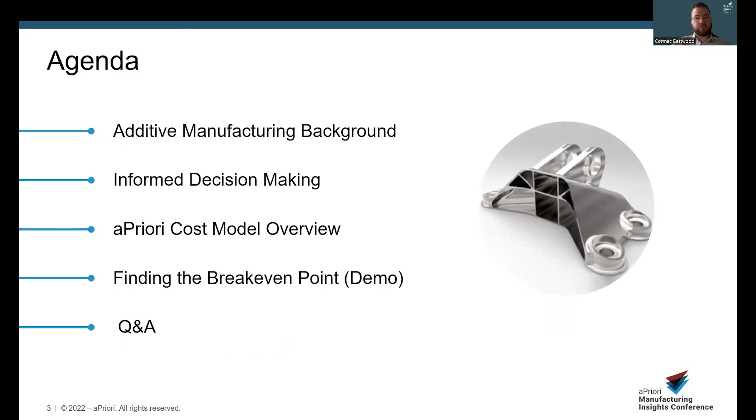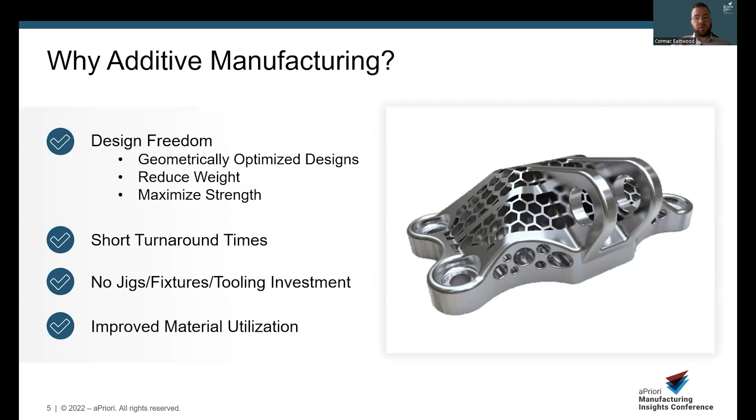So why would you choose additive manufacturing? Additive manufacturing gives you design freedom, allowing you to optimize designs while reducing weight and maximizing strength. We can decrease turnaround times and reduce investment, as there will be no jigs, fixtures, or tooling required. And quite importantly, we can improve our material utilization by only using what we need.

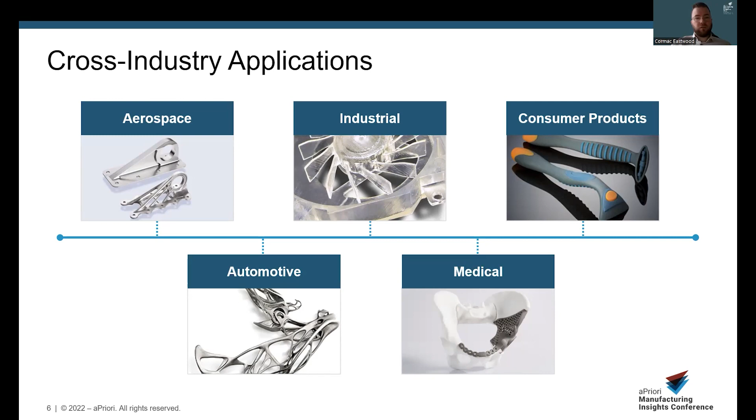Additive manufacturing can be utilized across many industries. It truly gives us design freedom to fix a wide range of problems, ranging from medical inserts through consumer products to industrial, aerospace, and automotive. In aPriori, we support 4 different processes within additive manufacturing.

These processes are material jetting, which is what most people recognize as 3D printing. This lets us deposit droplets in a layer-by-layer format and cures by UV light. Typical uses here are for non-functional prototypes, and the materials we utilize are rubber, ABS, polypropylene, or wax casting.

The second process we look at is direct metal laser sintering. Here we use a metallic powder to create a part, also printed on a layer-by-layer format. The typical uses here would be checking the fit, form, and function of a new design without paying for an expensive part. And our typical materials here are metallic, as mentioned by the powder. So we would have aluminium, cobalt chrome, copper, Dentaurum, and various ranges of steels and titanium alloys.

Our third process would be selective laser sintering. So here we use a reservoir of powder, which then gets solidified using the laser, again being built on a layer-by-layer format. Again, we look at uses here of fit, form, and function prototypes. However, here we use materials such as plastics of nylon, polystyrene, polyetheramide, PS, and PA.

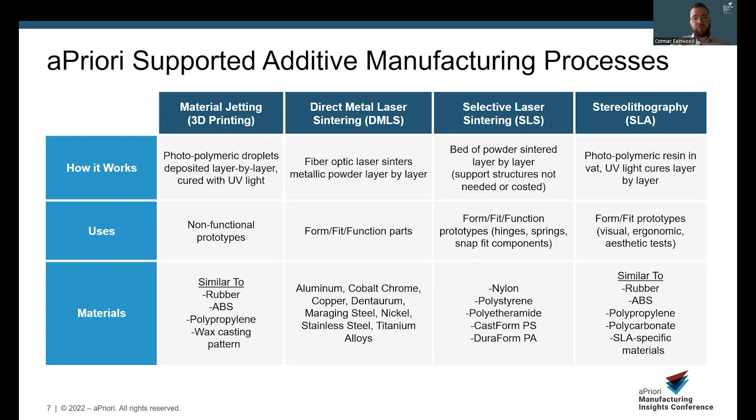So let's have a check on informed decision making. What trade-offs do we need to consider for additive manufacturing? If we use traditional methods, we get cheap parts which may be slightly heavier at high volumes. However, at low volumes, our part cost rises in traditional methods such as machining or casting. Part cost in additive can be high, however, it will likely be lower than subtractive manufacturing methods for the lower batch numbers we talk about in prototypes.

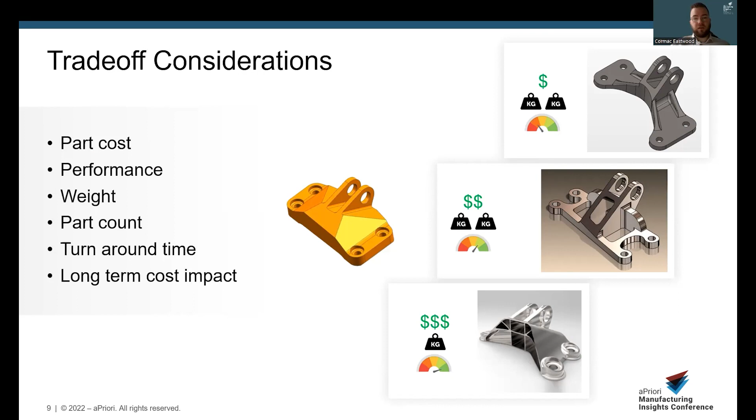If the performance is acceptable and the weight is optimized, typically these parts can be turned around in a short lead time. So that turnaround time is a key consideration. As we grow our production volumes, this becomes a key factor in the break-even point between methods. The higher the volumes, the lower the cost for traditional methods due to machine utilization. Additive manufacturing is not as cost-effective in this regard as your production volumes go into the thousands. Additive machines are cheaper and costs level off a lot sooner, so there's less of a cost delta as the volumes grow.

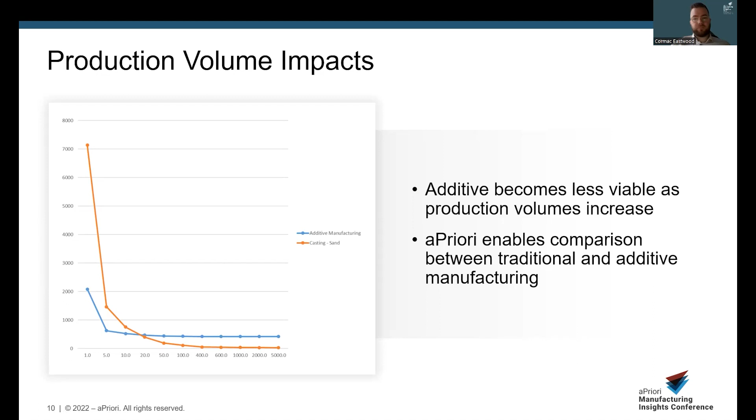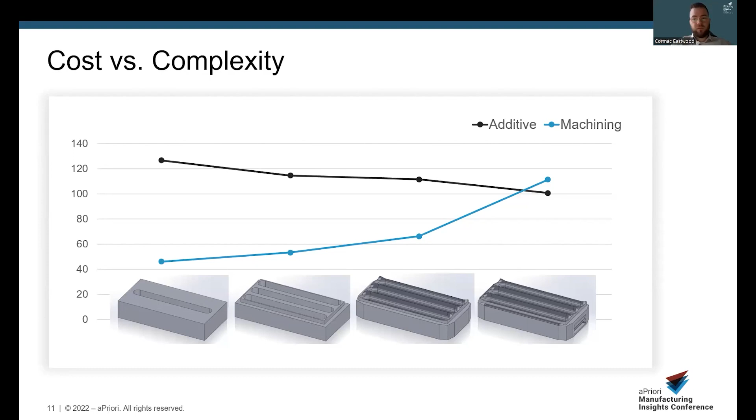Although additive doesn't have a huge cost delta as the volumes grow, it also doesn't have a huge cost delta between simple and complex parts. So the flexibility to print detail, if required, is there for the users. Balance this against a machined detail part. A detailed machining part may require a lot of passes, some tool changes, possibly machine changes, which will obviously drive cost up. Subtractive methods will have a greater cost delta between simple and complex.

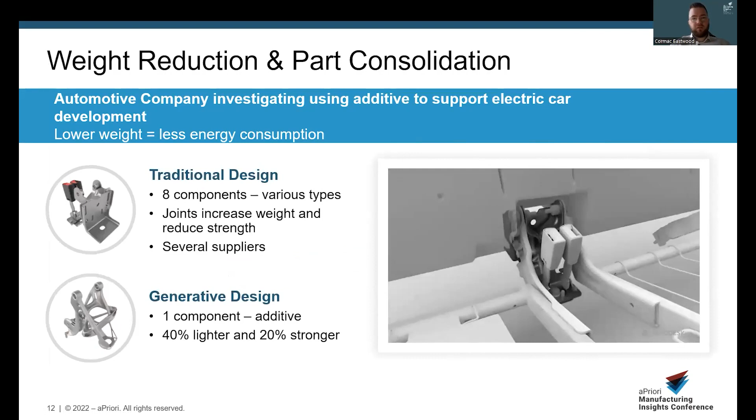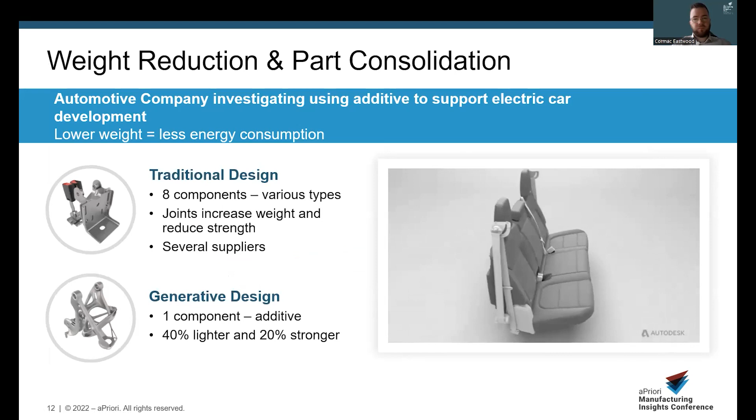Let's take this automotive example of additive weight reduction and part consolidation. An automotive company was investigating using additive to support electric car development. So obviously the lower weight in an electric car, the less energy consumed through the battery. Traditional design in this example had 8 components of various different types, plastics, metals, etc. Joints increase weight and reduce strength in this 8-component assembly, and also there's several suppliers to manage.

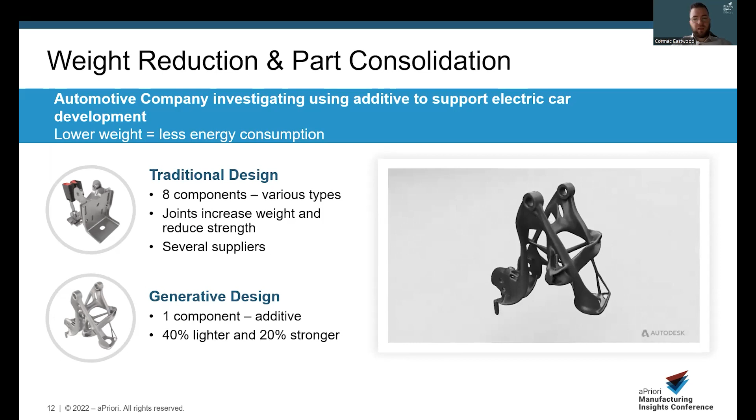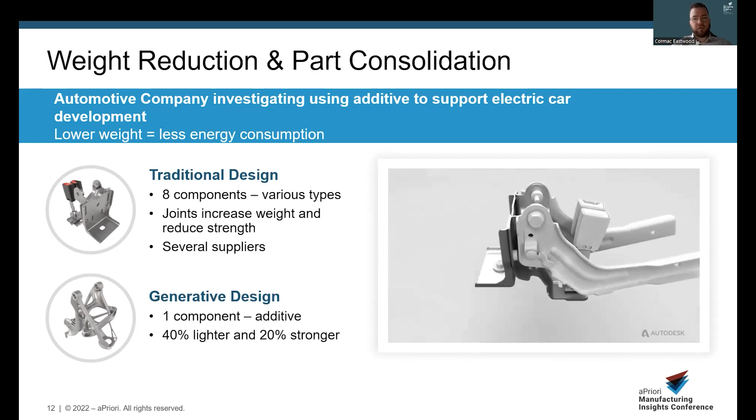Using generative design and considering additive manufacturing processes, the designer can reduce the number of parts to one component, making the component lighter and stronger, and also can utilize on his cost journey aPriori to cost during the different iterations of generative design. This allows the designer to pick the preferred method of additive manufacturing process.

So what about the aPriori cost model? In aPriori, we look at real-time cost simulation applied to additive manufacturing. Currently, we support 4 processes, as previously discussed: direct metal laser sintering, selective laser sintering, material jetting, and stereolithography. Our use cases in additive manufacturing would be early design decision-making, design to cost part optimization, and supplier negotiation.

The key features here are physics-based cycle time calculations, build direction, so we can simulate different options across different build directions, support structure identification and removal, evaluating our tolerances, evaluating our secondary machining options, material cost trade-offs, nesting optimization, and evaluating our layer thickness overrides.

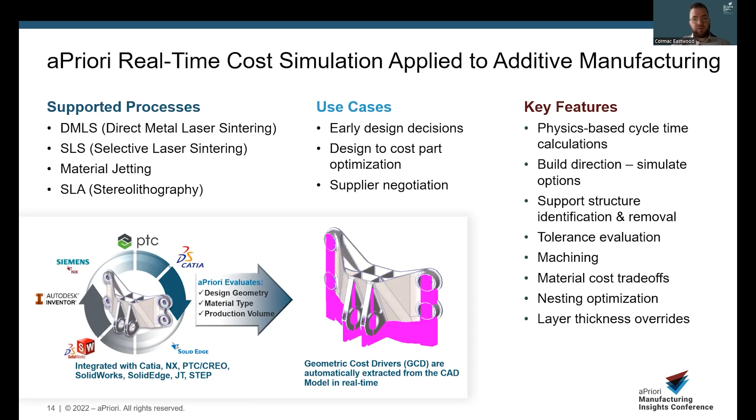So let's have a look at aPriori Professional and demo how we can do some break-even analysis. In this demo, we're going to cost some parts in additive processes, and then we're going to compare them with a casting part of a similar geometry and understand what is our break-even point. The first thing we're going to do is open an additive part in aPriori Professional.

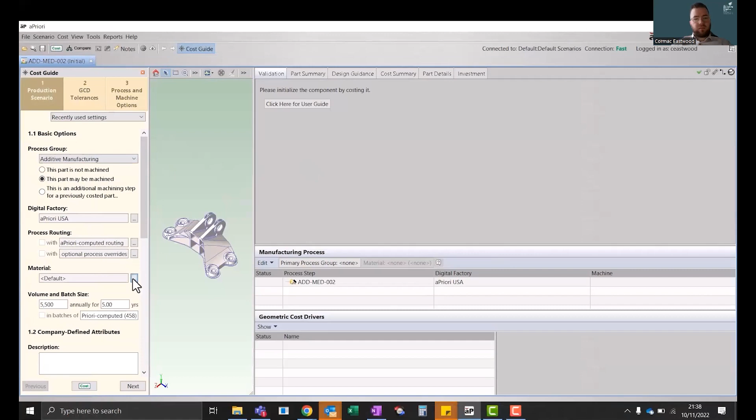Now we're going to select additive manufacturing in the cost guide, and we're going to select a material for our initial cost. What you will see in the material selection is that we have a process column. So each material is assigned to a process, and the user can, from this point, effectively pick the process they're using. We're going to start off with 3D printing.

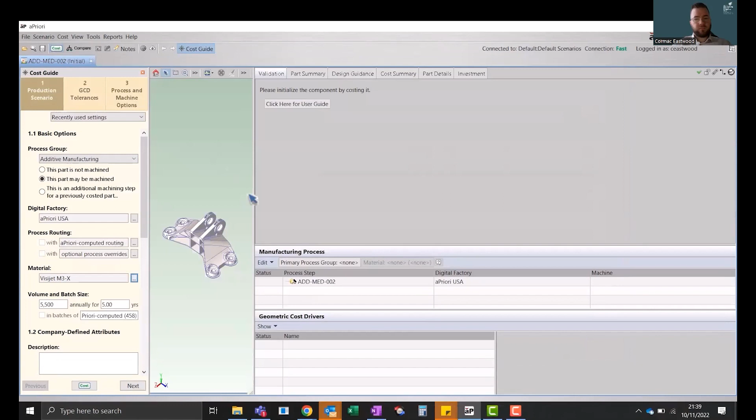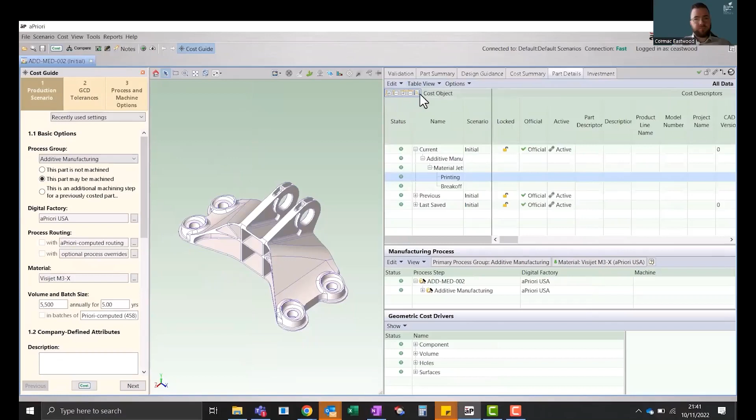I'm going to select an ABS type material to force aPriori to cost in the 3D printing process. So now that we have our cost and our completed costing, I'm just going to have a quick look at the processes under material jetting. So we have printing, which is our 3D printing, and break off, which will break off our support structure. Quite a simple process, material jetting.

Now we're going to look at our cycle time. So our cycle time currently is around 1890 seconds. Now let's go to our process setup options. Previously I mentioned layer thickness. We're going to change our layer thickness value from our default 0.03 millimeters to 0.06 millimeters.

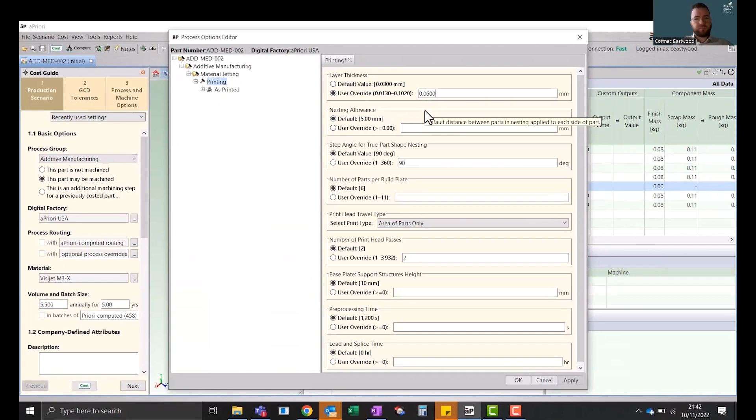So our layer thickness is the amount of material deposited in each layer across the bed. So the thicker the layer, the fewer passes to create the part. So let's see how that affects our cost. As you can see, our cycle time has now reduced to 1290 seconds.

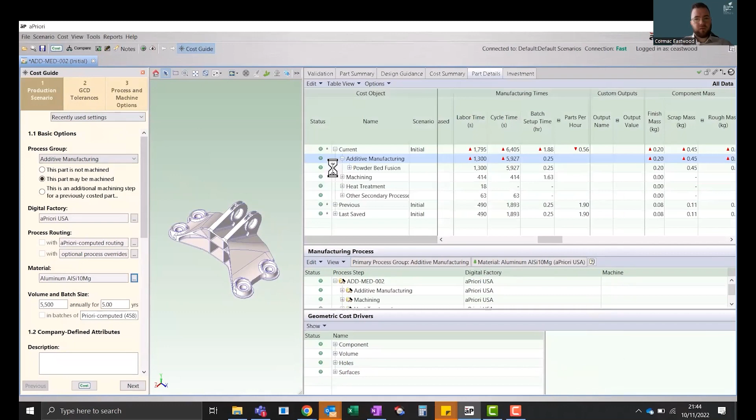So now let's move on to our direct metal laser sintering. I just selected an aluminium material as we're going to compare an aluminium printed part with an aluminium casted part. So again, let's look at the processes involved. So we have metal sintering.

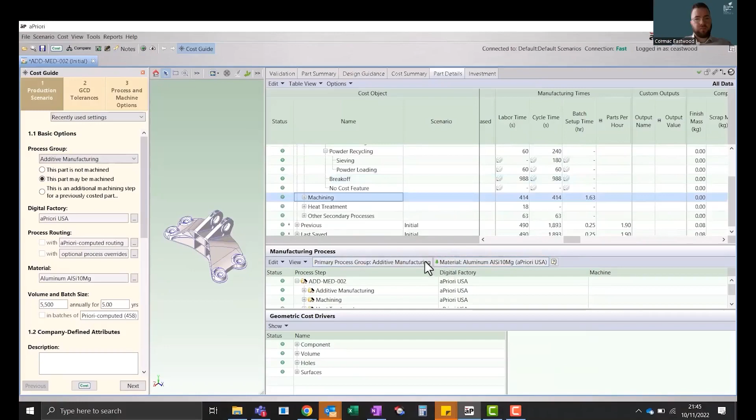We have a powder recycling, which includes sieving and powder loading. Again, we have a break off, which breaks our support structures. We also have some secondary machining and heat treatments due to this being a metal part. These are all default processes added by aPriori.

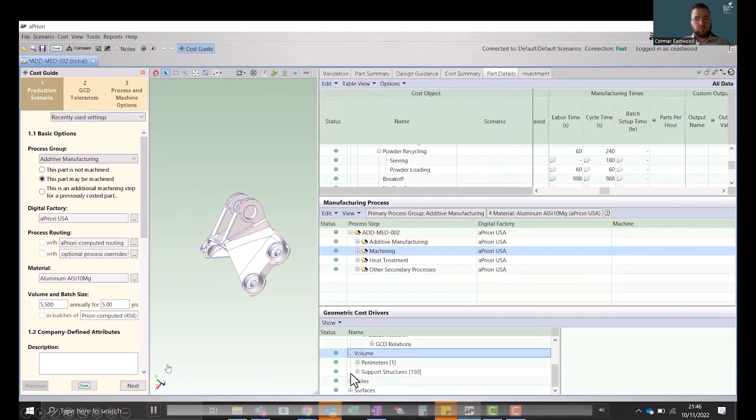Here we can also see our build direction. So the direction of the arrow shows the direction that the build is occurring on. We can also now see our support structures. Our support structures are shown in pink, and this is the structure from the bed of the table used to build the part in a vertical direction.

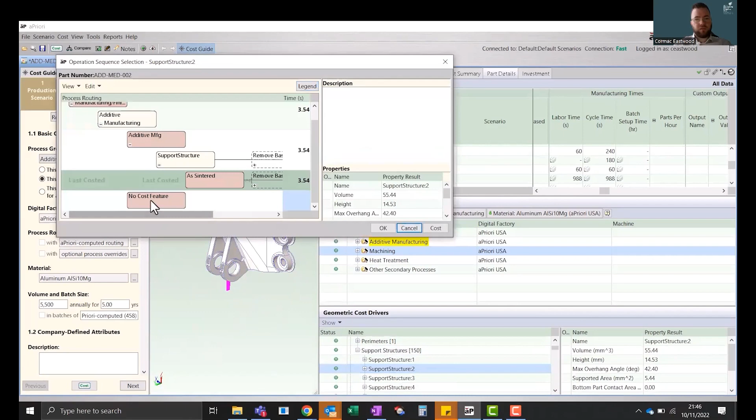After the part is printed, the support structures will then be cut off. However, if you find a support structure is not valid in your assessment, you can create a no-cost feature, as we've just done with support structure 2. This will ignore that support structure in your costing analysis.

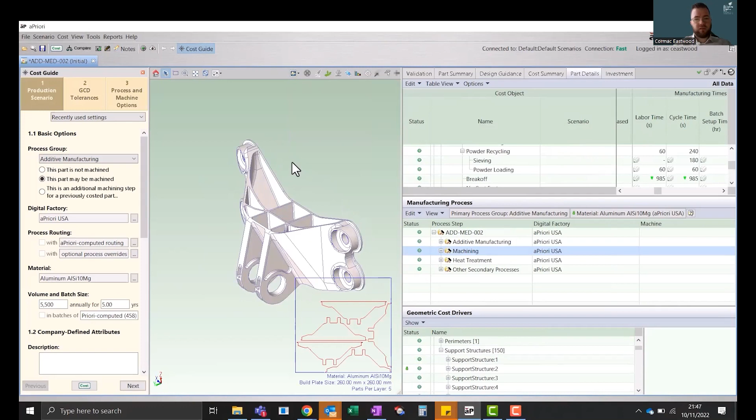The last thing to check before we do any break-even analysis is our nesting, as mentioned before. aPriori will nest your parts based on the bed size of the machine selected, similar to how we nest sheet metal and stock machining. This will best utilize your machining features.

So now we're going to move on to our analysis. Previously, our volume was 5,500. I'm going to change our volume to a volume of 30, which gives us a more realistic volume for a prototype part. On costing this part, our cost has gone from $150. If we just wait for the costing to complete, it has now changed to $360. So again, lower volume, higher cost.

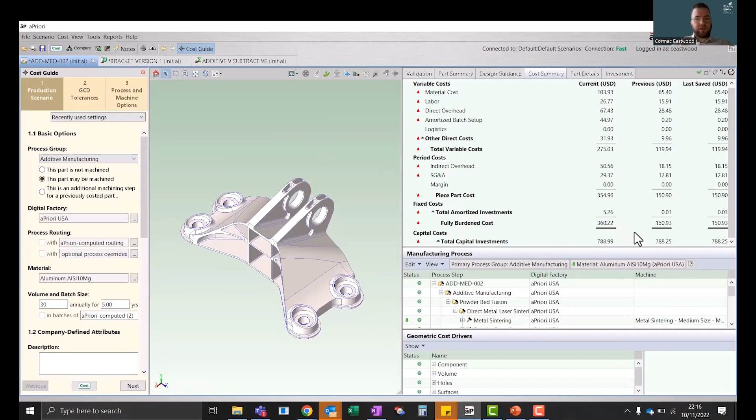Now we're going to open a casting part to compare against. This casting part has been designed in the same manner as the 3D printed part, and we're also going to cost this with 30 per year. So the cost for this part is $537. So at this point, we would say that aPriori is selecting the additive part as the more cost-effective part.

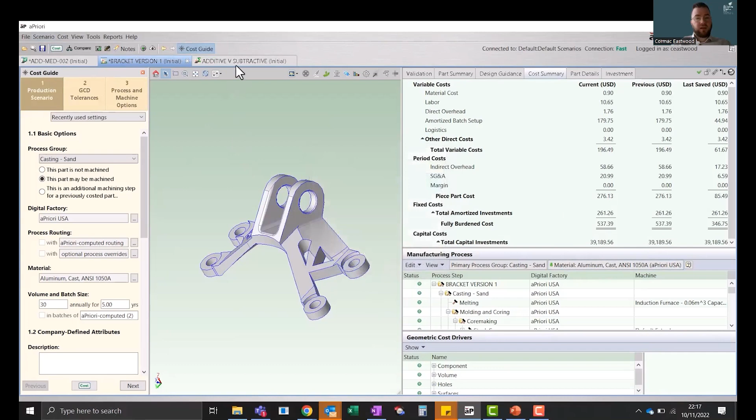So I've now created a roll-up of each of the parts, the one additive part and the one casting sand part. As we can see, we do have that cost difference, $360 for the additive part, $537 for the casting part. We're now going to utilize an excellent report created by our expert services team, which will show us a break-even crossover point in Excel. So let's launch the report.

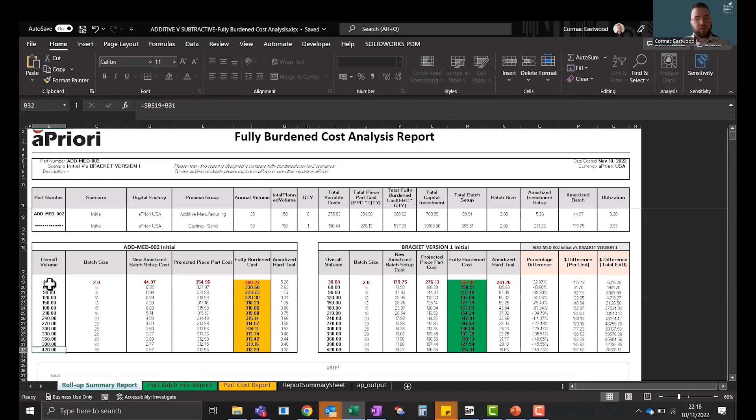So this report will take our basic volume of 30 and will create a table for each of the parts in increments of 30 up through annual volumes. We will then take those fully burdened costs from each of the annual volumes created and create a graphical output, which will then show us the crossover point.